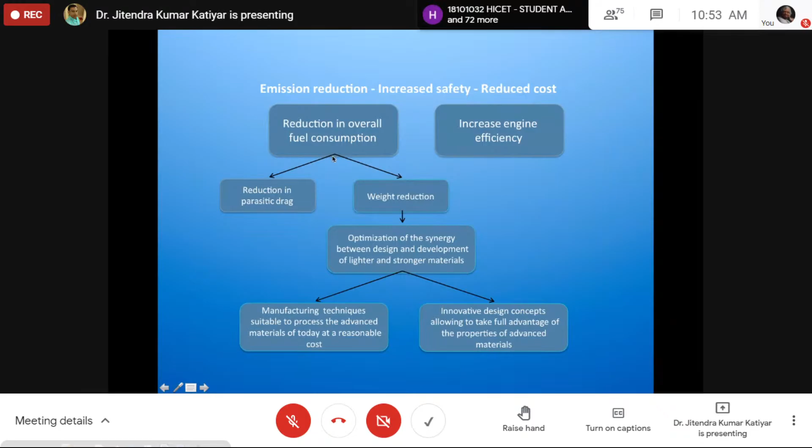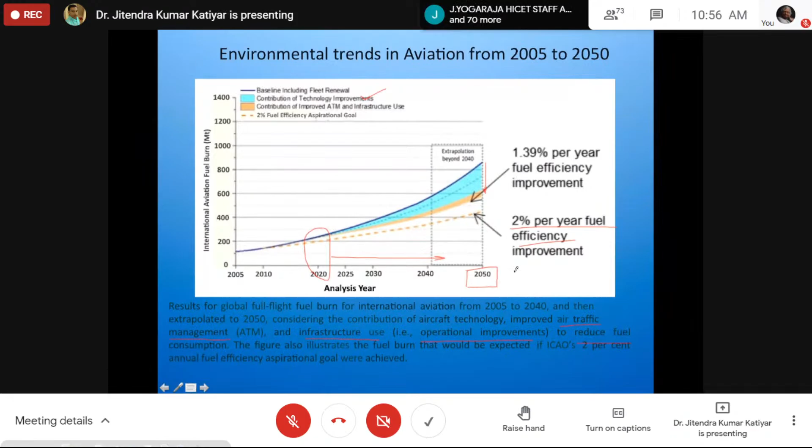So if you can improve operations through proper management of air traffic control, we can reduce the fuel consumption. If you can properly control the air traffic management, then you can improve fuel efficiency by 1.39% per year. These are the few figures predicted for international aviation fuel burn.

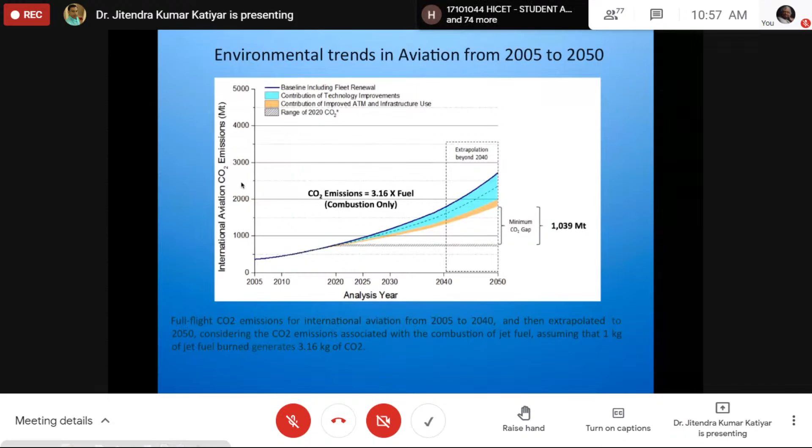Nowadays it is assumed that 1 kg of jet fuel burned generates 3.16 kg of CO2 by weight. That's why it is written here that CO2 emission equals 3.16 times the fuel. So if 1 kg of fuel is burned, you will get 3.16 kg of CO2 in the environment. So it is very important to control CO2 emission and keep the environment safe. We design the material, or we reduce the weight of the aircraft. These are the methods I already showed you through which you can reduce CO2 and NOx emissions.

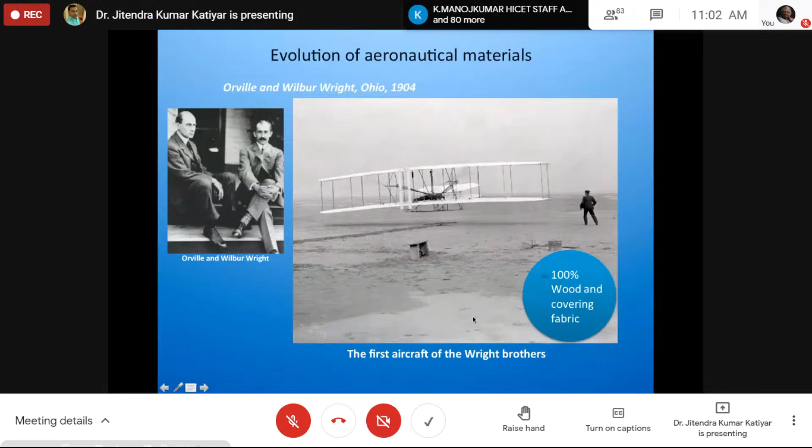We will show them one by one, starting when the Wright brothers developed their aircraft. The first aircraft developed by the Wright brothers, everybody knows it. They used 100% wood covered only with fabric. So this is the first aeronautical material, used by the Wright brothers: 100% wood covered by fabric.

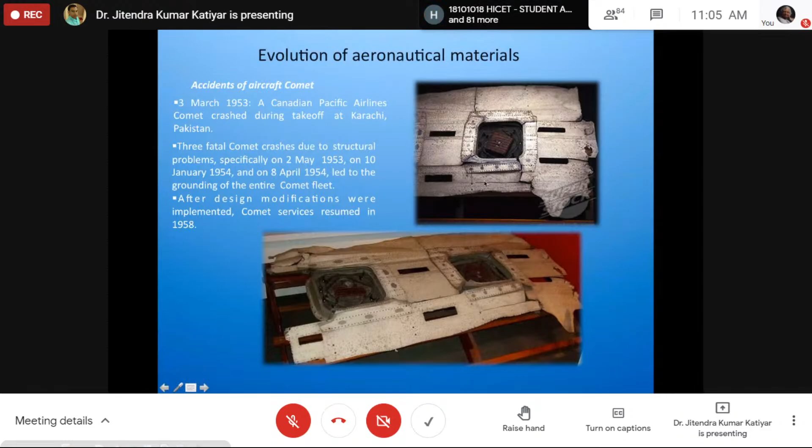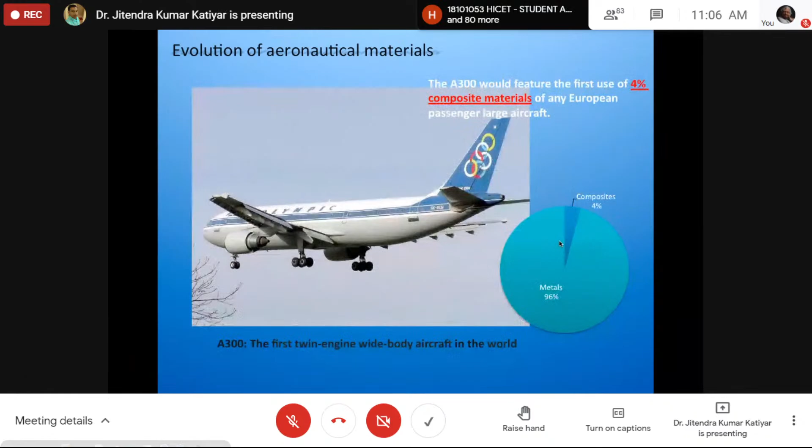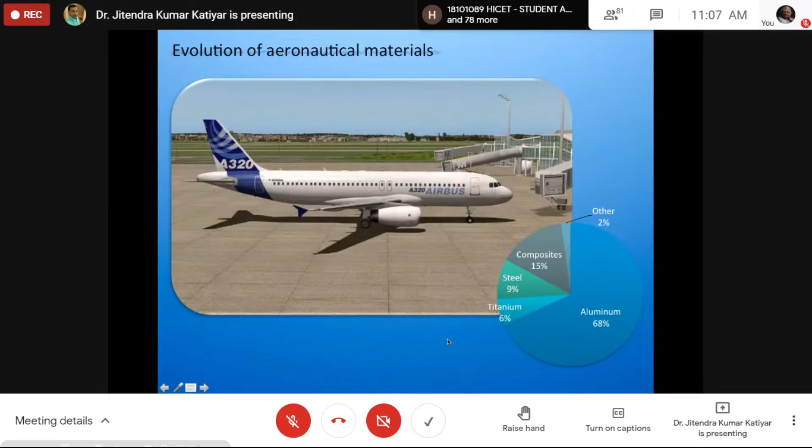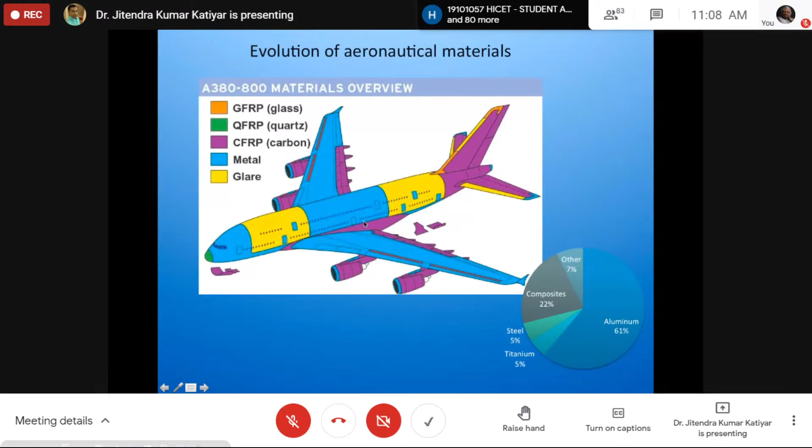So mostly for panels in this aircraft we use glass fiber reinforced polymer. This color you have seen in the tail, we use glass fiber and quartz fiber reinforced composite. These green ones we use in the tail. Carbon fiber reinforced composite is mostly used, maybe 30 to 40%. Then metal is reduced in some of the body; wings are made of aluminum metal and other things, and GLARE is also used for decoration-type purposes. So these are the new materials introduced recently.

So in aeronautical material, there are several parts: the nose and main landing gear, pylon and nacelle cowling, wing surface, fuselage skin, door, horizontal stabilizer, vertical stabilizer, steering, aileron, spoilers, flaps, and leading edge, or it is called a J-nose. So these are the materials you can see here. Mostly aluminum alloy was initially used, and these are now made of composite: carbon fiber reinforced, glass fiber reinforced, aramid fiber reinforced, and also we can reinforce titanium and steel to improve the toughness and strength of these jet engines.

For the landing gear, we need more strength because the whole weight comes over the landing gear. So for non-movable parts, we go for metallic ones. For movable parts, we go for composite ones. For engine and pylons, we go for steel and titanium. For landing gears, we choose steel because of its high strength, and it can also absorb shock. So these are the materials used in the aeronautical industry.

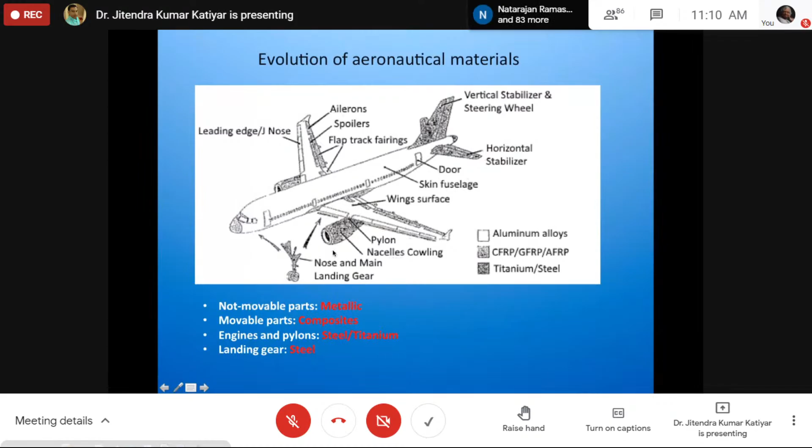If you want to operate your knee or hip joint, then we go for titanium material for knee implants. So orthopedic implants are made up of titanium, and nowadays we also use biocompatible polymer coating in orthopedics. So slowly we are moving to environment-friendly, biodegradable material that you can easily recycle.

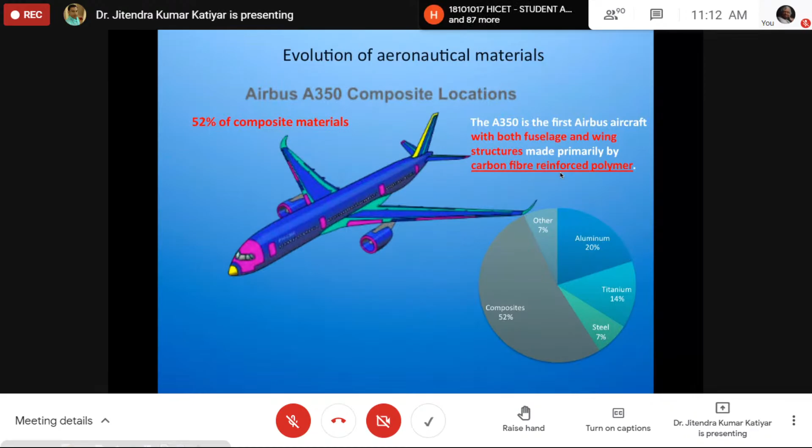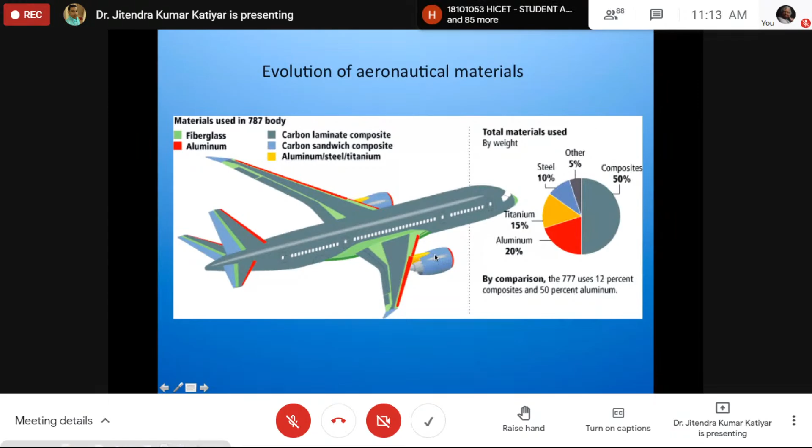So we are mostly reducing the aluminum, and all parts of this Airbus are made up of carbon laminate composite or carbon sandwich composite, with a very small amount of aluminum, steel, and titanium material where we need high strength, because the jet engine is held by the wing and flap. So for holding purpose it needs strength. That's why we use metal, aluminum, steel, and titanium, which provide more strength and can properly hold the jet engines.

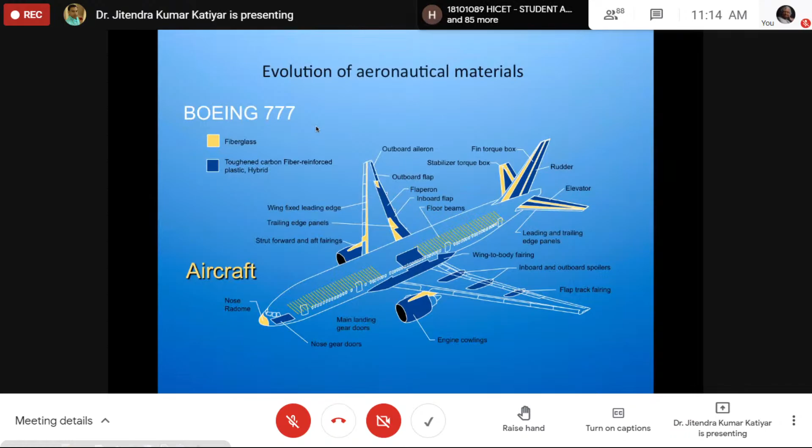So this also we are using here nowadays. Boeing 777 aircraft, we use fiberglass, mostly toughened glass, and a hybrid one also we mix with composite and metals. So that is the hybrid one. We use additives to improve the strength of each and every material of the aircraft.

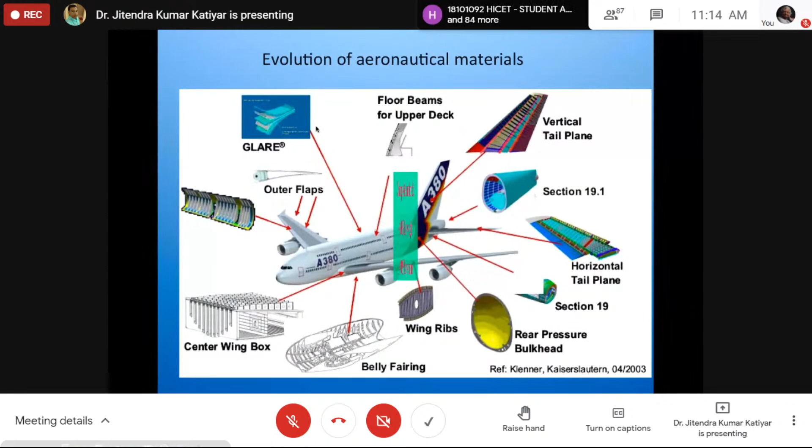So this Airbus 380, you can see the different cross sections, and in this particular Airbus, we use composite material 60% by weight and 80% by volume.

So mostly we are moving into lighter weight. When you reduce the weight of the Airbus, then you can improve fuel consumption, and it will not consume more fuel because of the light weight. So that's why if you want higher mileage on your bike or automobile four-wheeler, then you can reduce the weight, and you will get higher efficiency of your engine.

Like Splendor or Bajaj Platina, why do those bikes give more mileage? Because they are lighter in weight. But Bullet does not give that particular mileage, it gives only 20 or 30 or 25 because of the more weight. So if you can reduce the weight, then you can increase the efficiency of the engine.

So that is our aim also. Nowadays in automobiles also we are using composite material to improve strength as well as reduce the weight of the vehicle, so that you get more mileage from that particular vehicle. So these are the various evolutions of aeronautical material starting from 1904 till now, and now we'll move to the future.

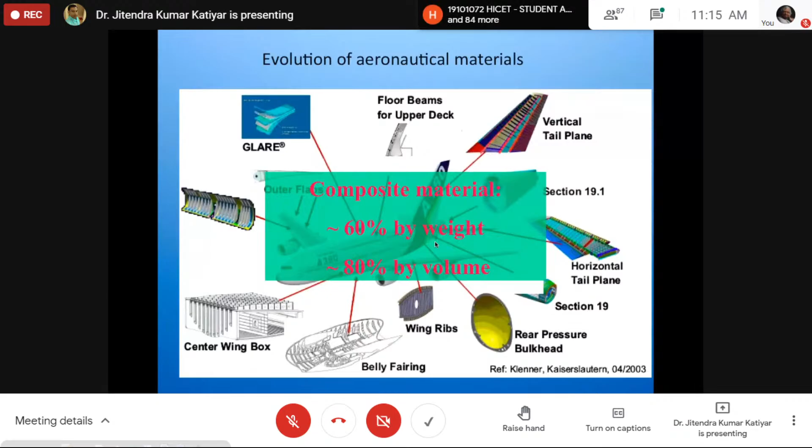So in this weight reduction, what we have seen is that the Airbus 380, which is 60%, has the lowest percentage of aluminum by weight of all flying Airbus models, with 20 different alloys and tempers compared to 6 utilized in Airbus 320 or 330 aircraft. So it is a very advanced aircraft, Airbus 380. It features application of new material, glare, in fuselage skins, giving improved fatigue and impact properties at lower density than existing materials.

That is why in Airbus we are mostly using composite material, hybrid composite material, to improve fatigue and impact properties. These are a few mechanical properties which are very important for your aircraft. So carbon fiber reinforced material and glare in Airbus let the weight reduction be 15 tons compared to what it would be if metallic material was used. So in this aircraft we reduce the weight by 15 tons in comparison to the metallic material used in other Airbuses.

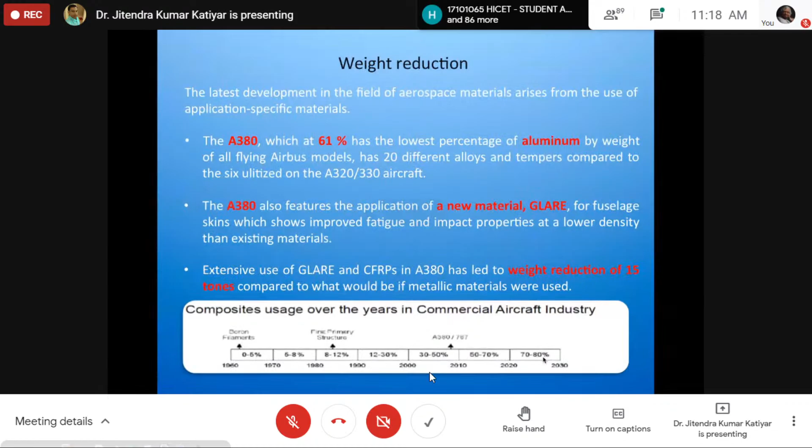So that metal we will use in the landing gears and a few flaps, that's it. Because landing gears can't be made from composite, since composite cannot absorb shocks and other things, so metal is good for that particular application.

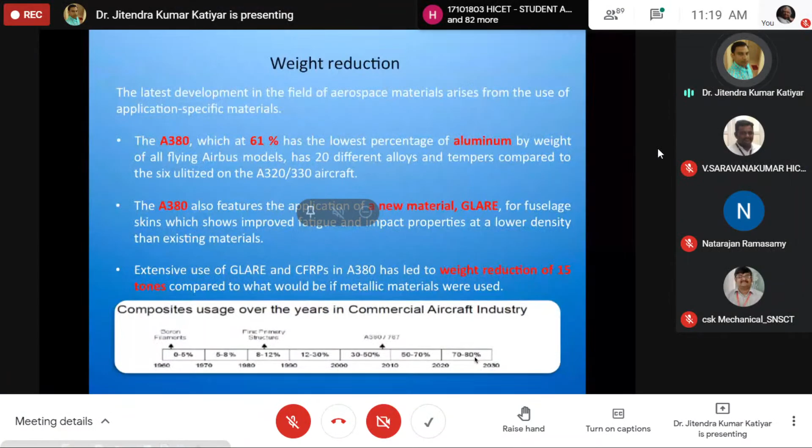So here, we just add the polymer, and we add some fillers. So we make the reinforcement and matrix, and we make the composite. This composite, like glass fiber composite, also needs to be made into a biodegradable biocomposite.

These are the biocomposites. So we are also targeting biodegradable composites for use in aircraft to reduce weight, so that we can improve fuel consumption efficiency. Biodegradable composite can be degraded easily in the environment without harming it.

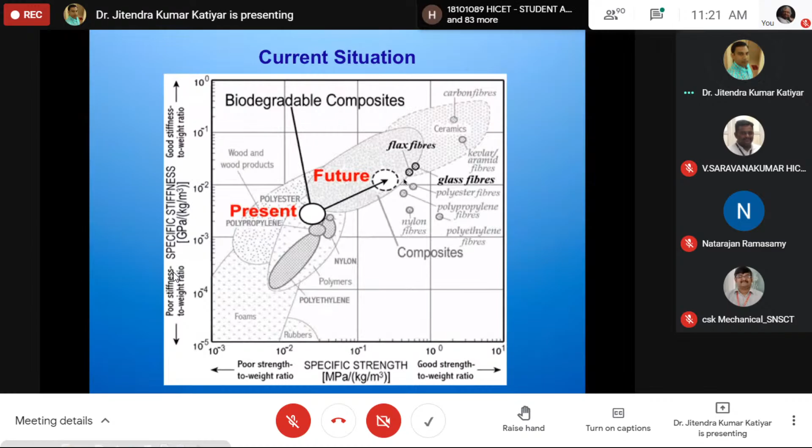So what is composite material? Because that is very important in fabrication. Composite is nothing but a mixture of two or more distinct materials to improve the property.

Each material has its own property. If you add just a single material, that will not serve the purpose. So what you will do is add 2 or 3 elements, and because each element has its own property, we can improve the complete property of the composite.

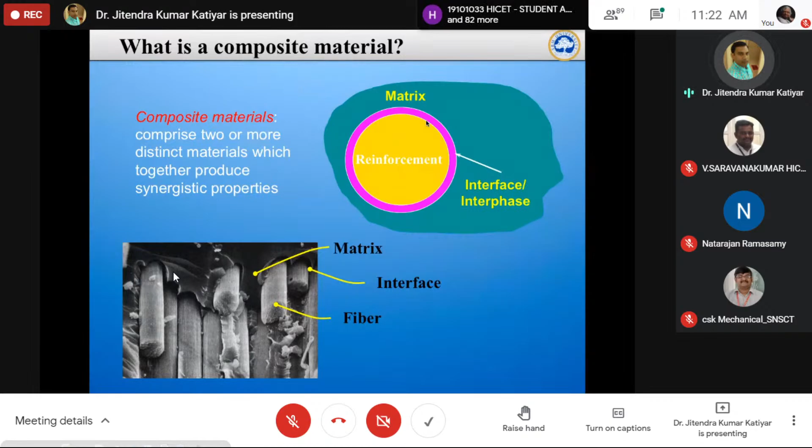It's like in a project group, in a final year project. Why do we select a group? Because each student has their own capability. Some students are good in entertainment, some in software, some in English writing, some in thinking, some in experiments. So we select the group, and one leader is required who can handle the group, who can club that particular group together. In that way, you utilize each student's property, and finally you get a very good product. That's also how we use it in materials.

So we add whatever our requirement is. According to requirement, we add that material, and the material properties mix together to give better properties than the parent material properties. That is called a composite.

So composite is nothing but the mixing of two or more distinct materials which together produce a synergistic property. That is called a composite.

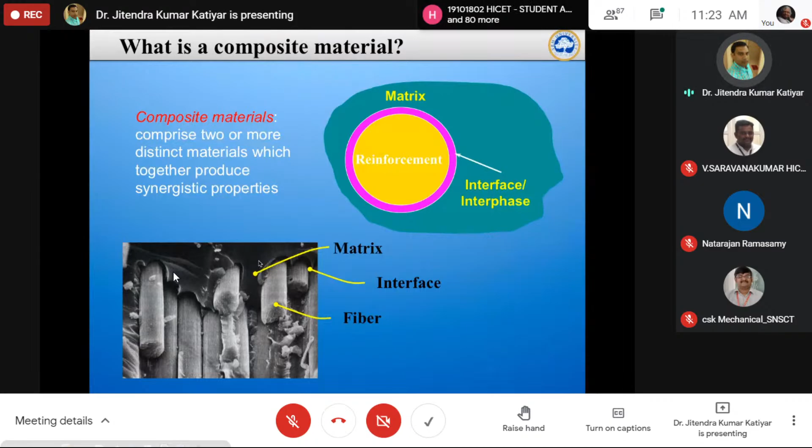The advantage of composite is high strength to weight ratio, and high stiffness to weight ratio that we need. If we can achieve this, we can save weight. If we can save weight, we can reduce fuel consumption. If we can reduce fuel consumption, we can reduce emissions of CO2 and NOx. Also, if weight is less, then noise can also be less.

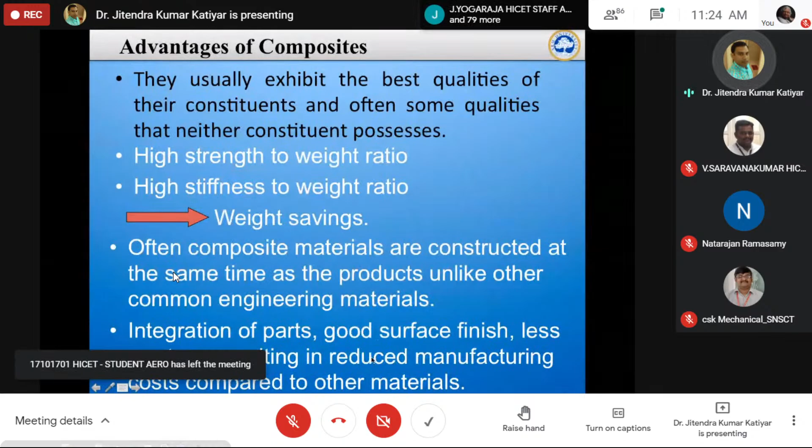Composite material can be constructed at the same time, unlike other common engineering materials, and it gives good surface finish, less wastage, and reduced manufacturing cost compared to other materials. Composite can have good fatigue property, good thermal property, and good thermal and acoustic insulation benefits.

According to the fiber and resin proportion we add, we can create the material property according to our need. So the main thing is how much quantity of matrix we need, how much quantity of reinforcement we need. If we can select properly, add it, and fabricate the composite, then you will achieve the desired property, whatever the requirement.

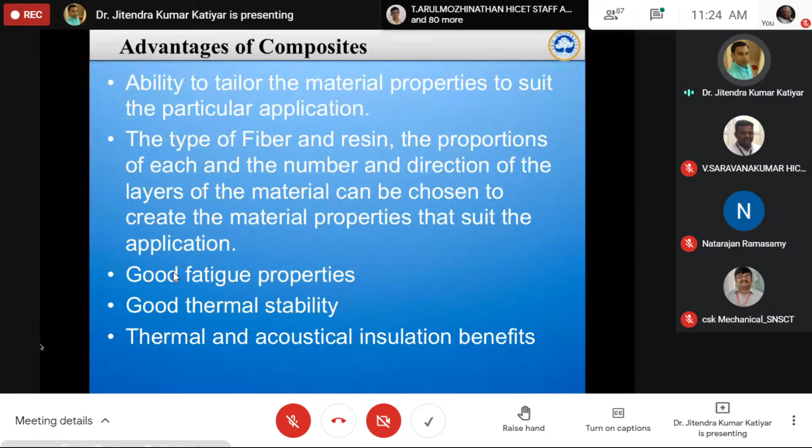Disadvantages of composite are that its initial cost is very high, it can behave in an anisotropic nature, and it has sensitivity to humidity. So we can also work on these aspects, on how we can reduce this sensitivity towards humidity.

Test methods also need to be developed so that we can test each and every aspect of the composite material, meaning tensile strength, fatigue strength, creep strength, and other properties. Test methods need to be developed because slowly we are moving to use more composite material in aircraft. In aircraft, several things happen, several loads occur, so we will see in further slides how the loads occur in the aircraft.

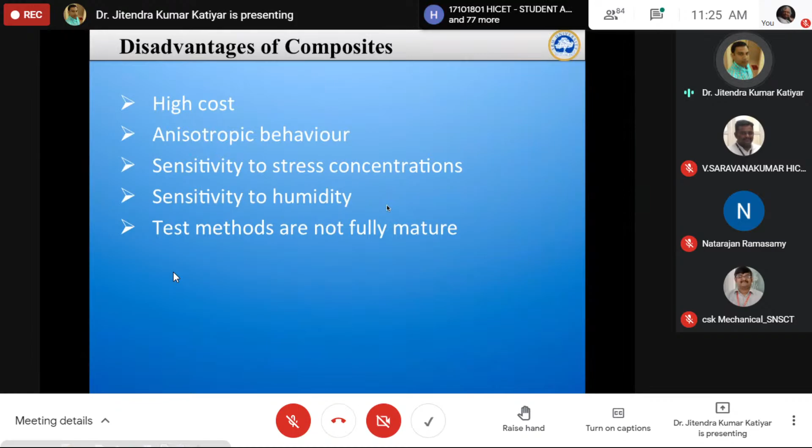So these are the classifications. We can go for either matrix type or reinforcement type. Three types of matrix are most widely used: polymer matrix, metal matrix, and ceramic matrix. Nowadays, polymer matrix is used in self-healing composites. Reinforcement comes in different kinds: whisker, particle, fiber, structural, and these are the further subcategories of reinforcement. So these are the basic classifications.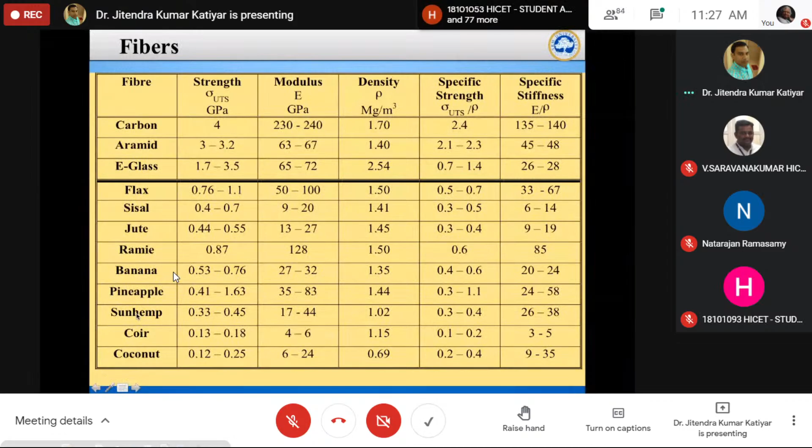This hemp fiber, you can see, has approximately E-glass fiber stiffness. According to that, we select hemp, which is widely used. Flax is also used because flax has more stiffness, close to aramid and other things. So flax and hemp are the fibers used as reinforcement.

Matrix is nothing but we can use epoxy, polyester - these are thermosetting - or metal one, or ceramic one. Nowadays we select epoxy because it is very good. PEEK and other things, we can't use those.

According to mechanical property, if we use metal, the mechanical property is good. But if we use polymer, the mechanical property is poor. So our target is how we can improve the strength or mechanical property of the polymer - what composition we add in reinforcement, which type of reinforcement we add in the matrix, so that we get a property at least similar to that particular metal, if not greater.

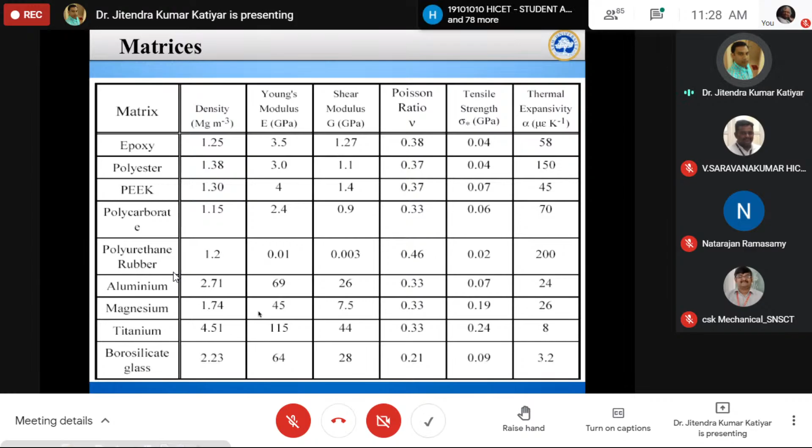In this way, research is still going on, and we are developing new materials by adding graphene, multi-wall carbon nanotube, or natural fiber, to improve strength and other properties. These are the various characteristics of the matrix required in terms of mechanical and thermal properties, processing characteristics, and chemical properties.

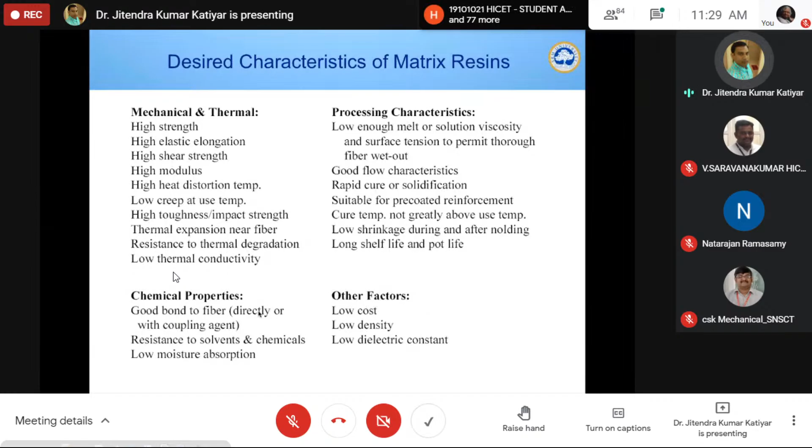So these are the various characteristics which are very important in selecting the proper matrix material. This evolution of the material I already explained earlier, but you can see here from 10,000 BC up till 2020 how the material is

developed as per our requirement. So initially we only have the stone, flint, pottery, glass. These are the ceramic materials. Wood, skin, fiber, straw, bricks. So these are the oldest materials. After that, according to our requirement in polymers, glue will come, then bakelite will come in 1900, nylon will come, then nowadays we are using high temperature polymers also, high modulus polymers.

These are the generations, and this is carbon reinforced fiber, aluminum, AFRP also, GFRP also. So these are the composites initially developed, and after development of these composites in this era, we increased the concentration of composites in the aircraft industry after evolution of these composites AFRP, CFRP, GFRP. And superalloys, zirconium alloys were also developed. Zirconium is widely used in nuclear power plants, and nuclear power is also booming nowadays. So this is how the material developed as per our requirement.

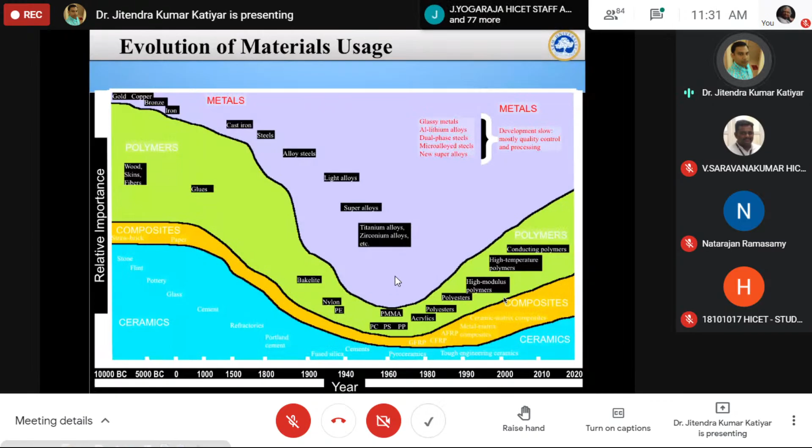So now we are further developing composite material which is biodegradable in nature, which does not affect the environment and also reduces the weight of the material. So back to the past again, you can see here Egypt. Egyptians and Mesopotamians used a mixture of mud and straw to create strong and durable buildings, and those buildings are still good if you maintain them properly.

So Egypt maintains that property, and it can increase tourism in that particular country. Mostly Egypt earns money from tourism only. But in our country, that is very poor. Nowadays, slowly we are increasing tourism. But previously, we were not able to sustain our old forts. If we can sustain them, then at least we can also improve tourism. That's why India is lacking in tourism. But slowly in the Modi government, we are targeting to increase tourism, and nowadays tourism has improved approximately 5 to 10% in India.

And this particular shield used in war, you can see two external laminates of hard bronze, two internal ones of tin, and a central laminate of pure and soft gold. So this type of shield was used in war in ancient Greek times, and this is the Egyptian times.

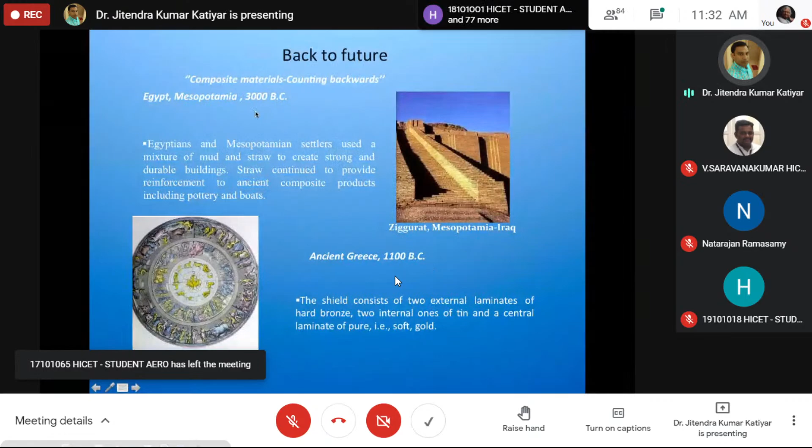So if sometimes fire happens in that particular aircraft and the temperature increases, it will not affect the material of the body structure. So that type of structure we need, and more adhesive in nature so that it will not be destroyed. So light structure design philosophy, we go into nowadays. Light structure is a matter of design, not a matter of weight. So how you can design properly is very, very important, not weight. Material selection is one major driver in light structure design philosophy.

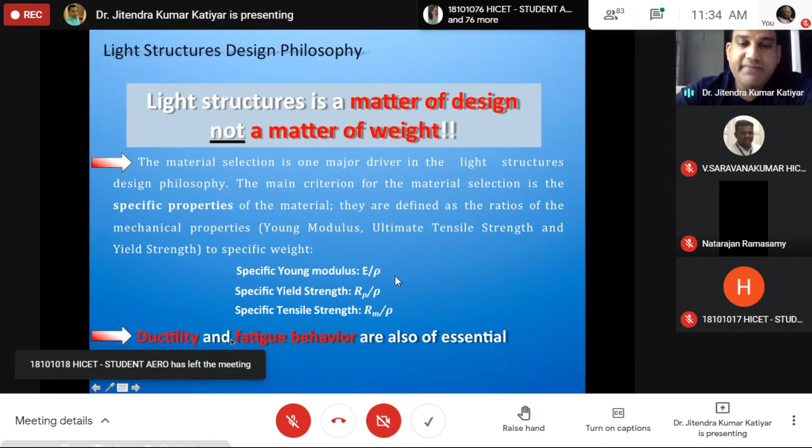First, we select the material. Nowadays we are targeting magnesium also, because it is a very light material. The main criterion of material selection is the specific property of the material, like Young's modulus, ultimate tensile strength, yield strength, per density. So specific Young's modulus is nothing but Young's modulus divided by the density of the material. That is called a specific property. Ductility and fatigue behavior are also essential concerns in the selection of the material.

Because you can see here the forces on the airplane, the 4 forces on the airplane, are very important. It is moving forward, so thrust force and drag force, then weight from the center of gravity, and the lift. These forces, thrust, lift and drag, act on the aircraft, and by controlling these forces we can fly, take off, and land that particular aircraft.

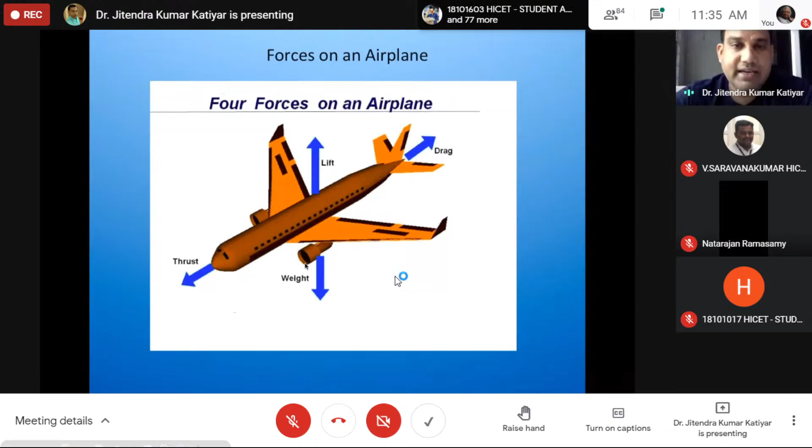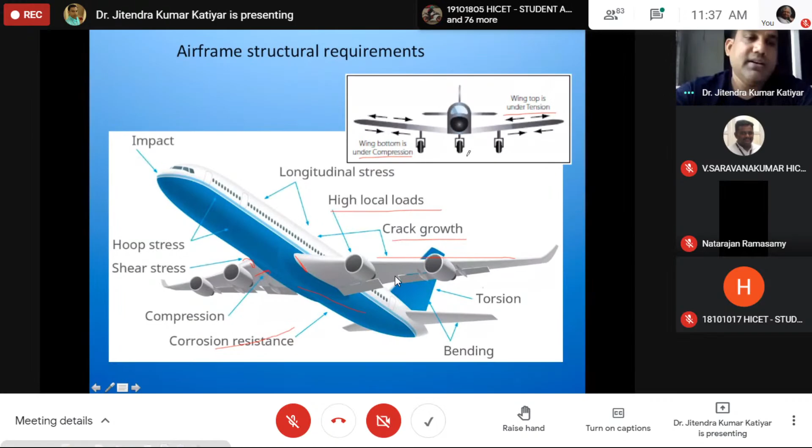So we can control the material, and we can control these loads. These are the very important mechanical properties required, and these are the design parameters. First, you select the material. According to the selection of the material, we perform the simulation taking into account these mechanical properties.

So aircraft structure material: we can go for 2024 T3, that type. Aluminum is the main base element, and other elements are added to improve the structural strength. You can see the ultimate tensile strength, Young's modulus, density, elongation at fracture. It can be improved, like aluminum 7075. That is widely used, with these other alloying elements, and it possesses more strength.

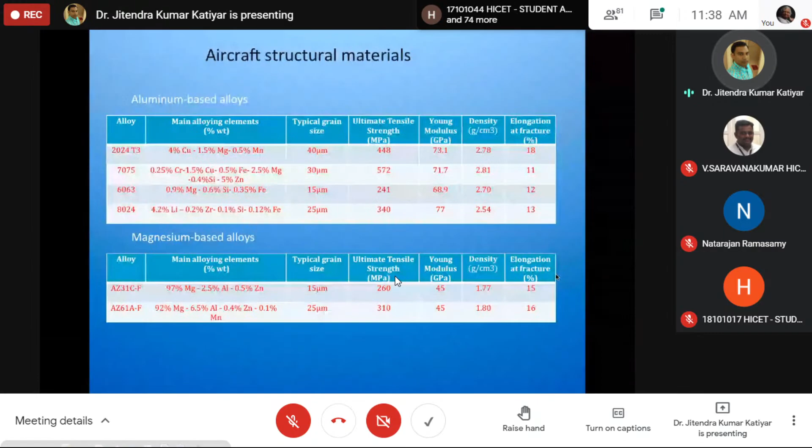Magnesium based alloys have more than 97% magnesium, with other elements aluminum and zinc. These kinds of alloys are called AZ31 or AZ61. In that one, we add 6.5% aluminum and 0.4% zinc. You can see the ultimate tensile strength is also improved in AZ61AF. So according to the alloy, we add the element and test the material's ultimate mechanical properties. That is very important for structural applications.

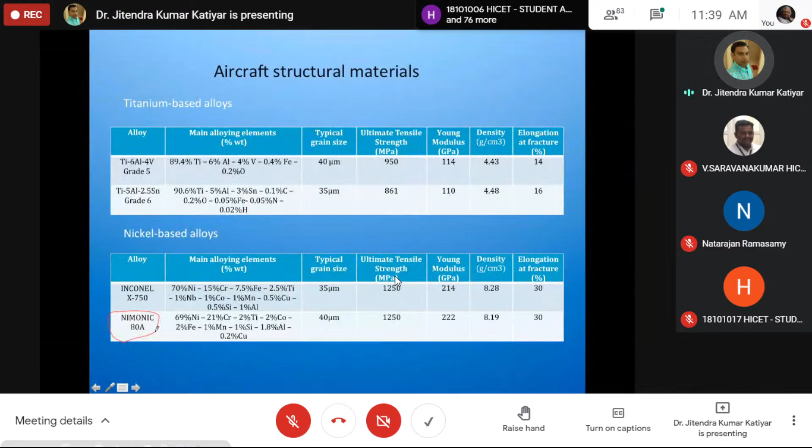Similarly, with titanium based alloys we get better ultimate tensile strength, better Young's modulus, and other properties too. Nickel based alloys go further than titanium. Inconel or Nimonic 80A gives you more tensile strength, more Young's modulus. These are the newest materials; after composites, we use these types of material in fabricating the aircraft structure wherever metal is required.

So according to our need and application, whether cargo based, passenger based aircraft, space aircraft, or fighter aircraft, whatever type of aircraft you want to develop, we select the proper material. After selecting the proper material, we do the testing. That is very important. So these are the differences between metal and composite materials.

We compare them here in terms of density, specific modulus, and specific strength. You can see with composites nowadays, we achieve a higher specific Young's modulus than metal, and also a higher specific strength than metal. So Kevlar fiber or carbon fiber reinforcement; that's why carbon fiber reinforcement makes up approximately 60% of the aircraft, and Kevlar fiber reinforcement is also used because of the high strength and high Young's modulus.

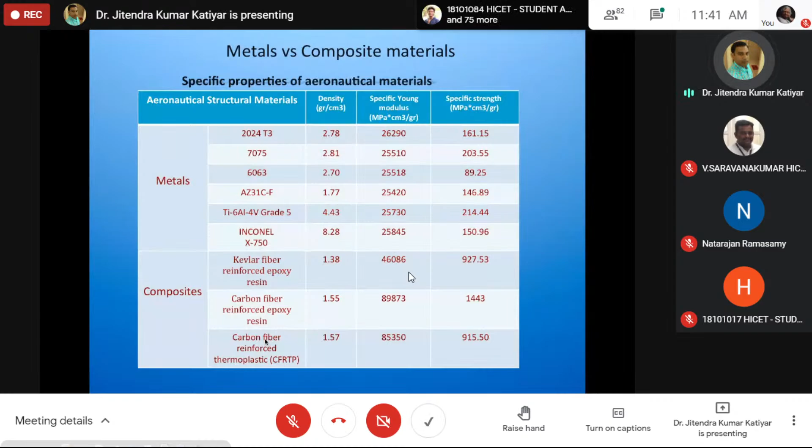So composite materials have the advantages: high strength to weight ratio, you can tailor-make the mechanical properties in various directions, corrosion resistance, impact resistance, design flexibility, and also fatigue resistance. But in the case of metal, it is safe, with high ductility, damage resistance, conductivity, because chances of crack propagation are also more in metal, and it is cost effective.

Joinable by various methods. So these are the metals, but in composites we can't join various materials. And drawbacks in composite material: reduced electrical conductivity, brittleness, inferior fire resistance, unpredictability, lack of recyclability, like in thermosetting if we are using it.

Heavy structure, prone to corrosion damage, inferior creep resistance. So in composite material, we need to improve the creep property also, apart from the fatigue property. And also we can look into the recyclability of the material, because metal you can recycle, but composite, if you are using thermosetting, can't be recycled. That you have to take care of.

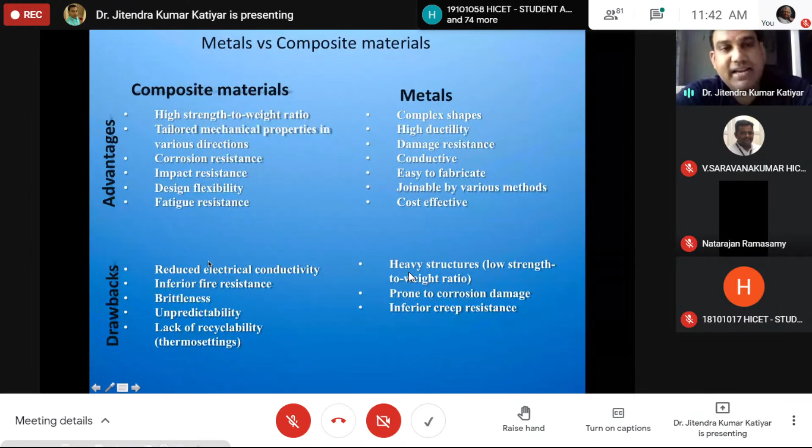And also composite material is brittle in nature. So how you can improve the toughness and other properties, and a little bit of softness we can incorporate by adding some material. Research is still going on. So this is the basic difference between metal and composite material.

It is cheaper than thermoplastics. It is chemically resistant, but thermoplastic is not chemically resistant. More difficult to surface finish. It can achieve a good surface finish. So these are the basic polymers which are used in the fabrication of composite structures.

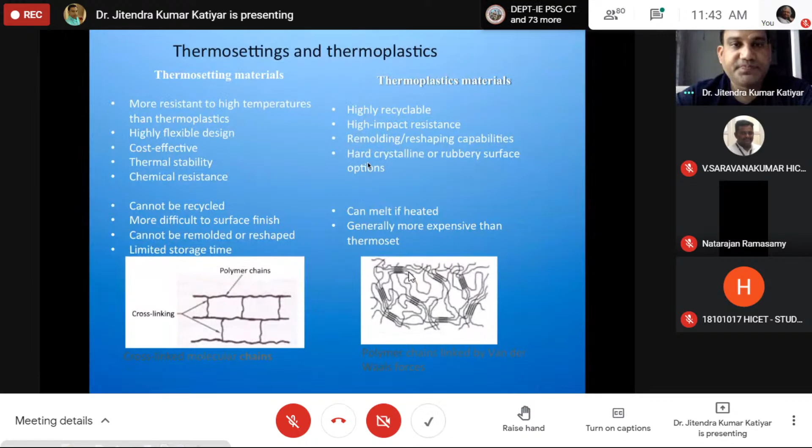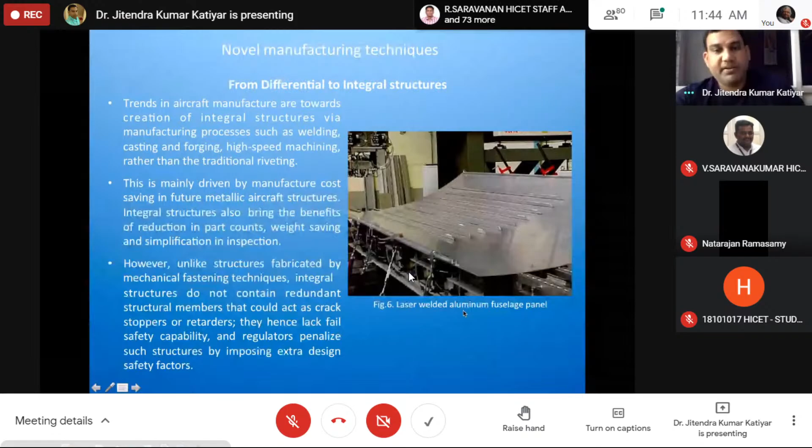Novel manufacturing techniques are also very important, how you can manufacture things. So laser welded aluminum fuselage panel. If you fuse panels, we use this type of heat affected zone. That is in manufacturing techniques. Sometimes we use thermoplastic components like this, and a metallic integral structure based on specific manufacturing such as welding, casting, forging, large scale extrusion, and high speed machining. This permits the modular prefabrication of large sections of aircraft before final assembly.

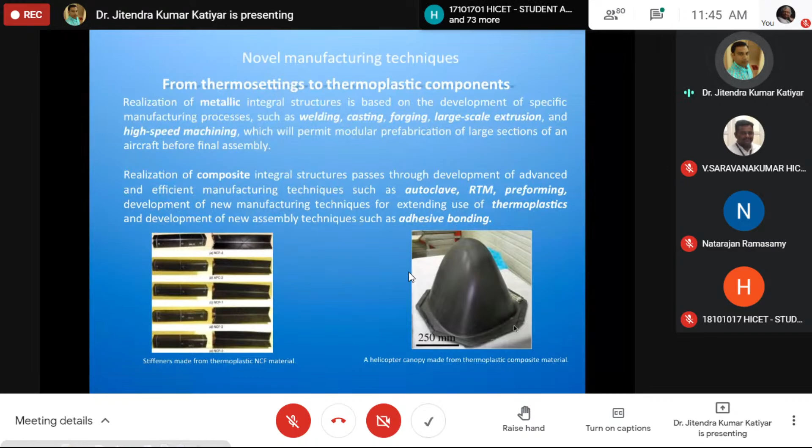So this is the nose aircraft canopy. A helicopter canopy we can make from thermoplastic composite material. So we can use different kinds of material; we select different materials and different processes. And the future aeronautical material is called a multifunctional material.

So we have polymers in it, so it can polymerize, and it can also have a healing agent. So if this is the composite material, you can insert some healing agent like this. These healing agents act as packets. So when cracks develop here, the healing agent packet can burst, and the healing agent in the packet comes out and fills that body. So the self-healing property can be improved.

Like in Hollywood movies, you have seen the Wolverine series. Wolverine has a self-healing property. If something strikes his body, it can heal again and close that impact. Self-healing properties are also available in animals. So taking inspiration from nature, we also produce self-healing materials.

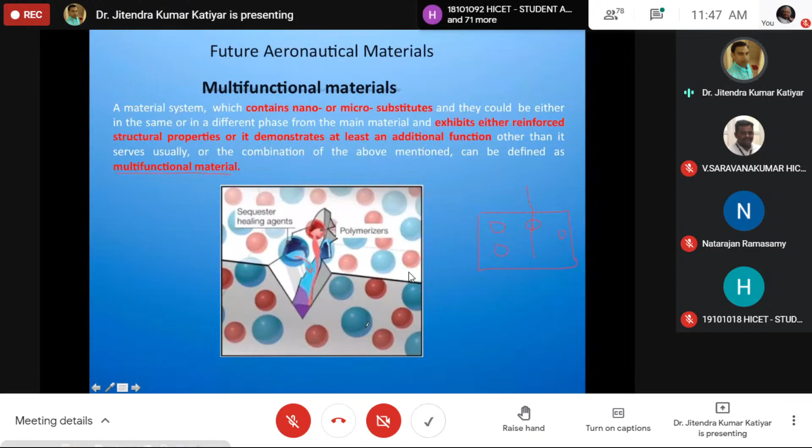So that's why, due to the higher friction, sometimes cracks develop, and those cracks can immediately be filled automatically. So that is called a multifunctional material.

Then another material which is very strong, that is graphene. It is a new development of the 21st century, and that material is very strong. It can even hold an elephant, that much strong. Its Young's modulus is 1 terapascal, and tensile strength is 1100 gigapascal. So graphene is the strongest material developed in the 21st century.

And if we add this nano graphene inside the matrix, then we can improve the strength. And that type of reinforcement is called carbon fiber reinforcement. This graphene is nothing but an allotrope of carbon. So this is carbon fiber reinforced composite.

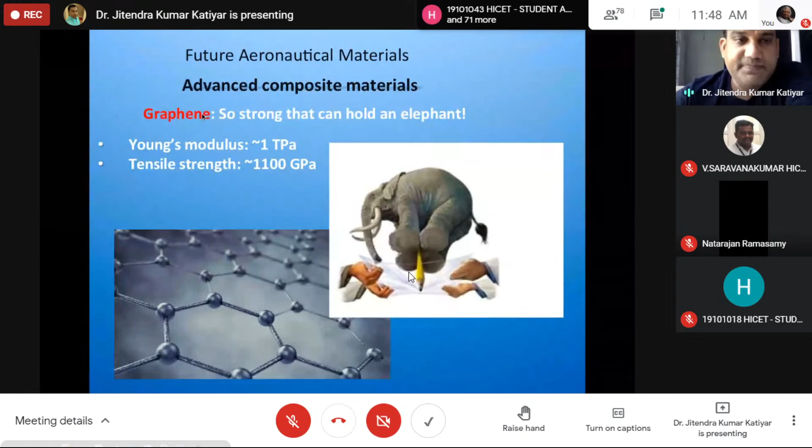Another is the multi-wall carbon nanotube, and these are also used in advanced composite materials. Young's modulus is 1 terapascal and tensile strength is 60 gigapascal. Electrical conductivity: wherever we need electrically conductive composite material, we use the carbon nanotube. So this is widely used in the electrical industry; the composite material which contains carbon nanotubes has better electrical conductivity. These are the structures of the carbon nanotube. So this is also a future aeronautical material.

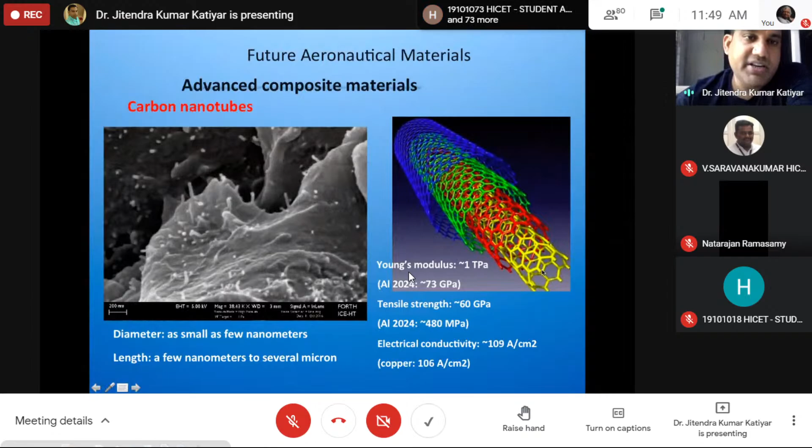Self-healing material, as I already told you, is also a multifunctional material. Polymer structures are susceptible to crack damage. So this is the polymer material where you have inserted some catalyst or microcapsules. When cracks propagate, they can burst this healing agent. The healing agent comes out, polymerizes, and fills the gap.

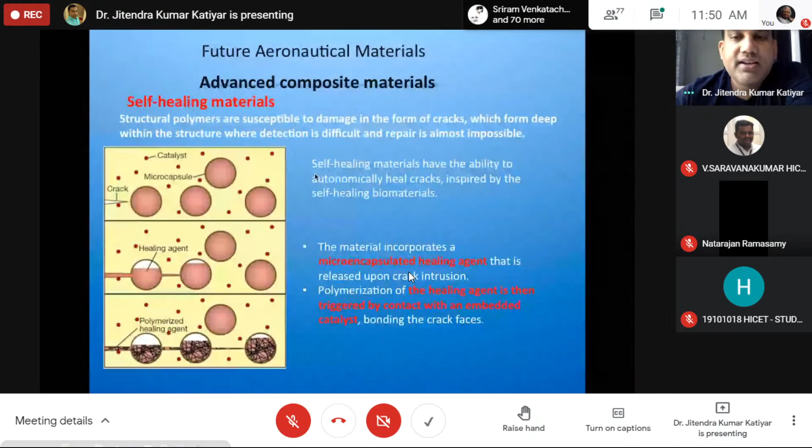So self-healing materials have the ability to autonomically heal cracks, inspired by self-healing biomaterials. The material incorporates a micro-encapsulated healing agent that is released upon crack intrusion. After crack intrusion, the healing agent comes and the polymerization reaction happens, triggered by contact with the embedded catalyst, bonding the crack faces. So these are also future materials, and nowadays in spacecraft we are using self-healing material, which can automatically repair itself if cracks develop.

So the problem to be solved: to take advantage of the improved properties of multifunctional materials, there is a need to assess the effect of additives on the mechanical behavior and possible degradation of the mechanical behavior of the material. We use new multifunctional materials which reveal the significance of material production quality on the entire multifunctional material concept, which directly affects the degree of internal defects. These techniques should be affordable and low cost, and can enhance the use of the promising characteristics of the material in aircraft structure applications, in the future and nowadays also.

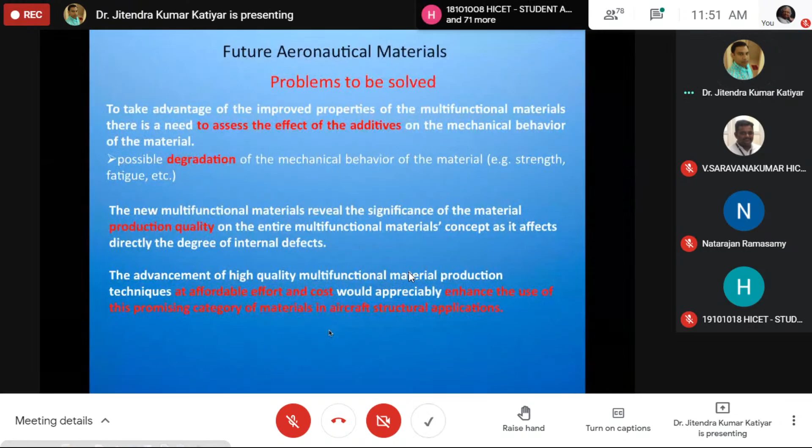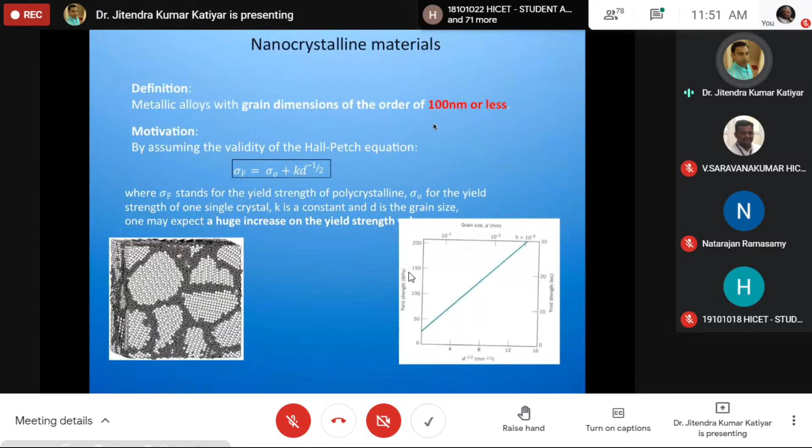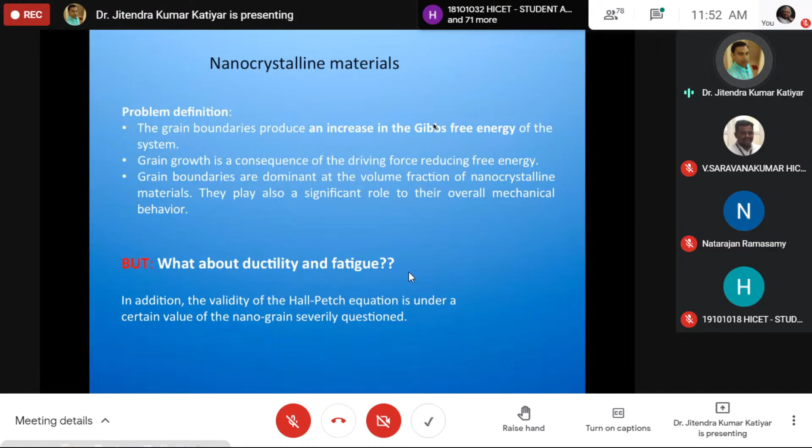So nanocrystalline material is also used. Metallic alloys with grain dimensions on the order of 100 nanometers or less are called nanocrystalline materials, and in the future we can also use them, because of the huge increase in yield strength after adding nanocrystalline material inside the matrix. What about the ductility and fatigue strength after adding it? Research is still going on. So you can also take some nanocrystalline material, add it in the matrix, and perform this test.

By adding this nanocrystalline material, it can significantly improve material properties at ambient temperature, and the objective is reducing the driving force by producing a metastable equilibrium state. The kinetic mechanism is reduced mobility; it does not eliminate the free energy driving force. The thermodynamic mechanism is creating a metastable equilibrium state, where the driving force is eliminated at the critical grain size. So that is a very stabilized material, nanocrystalline material, which is also a future material for aerospace applications.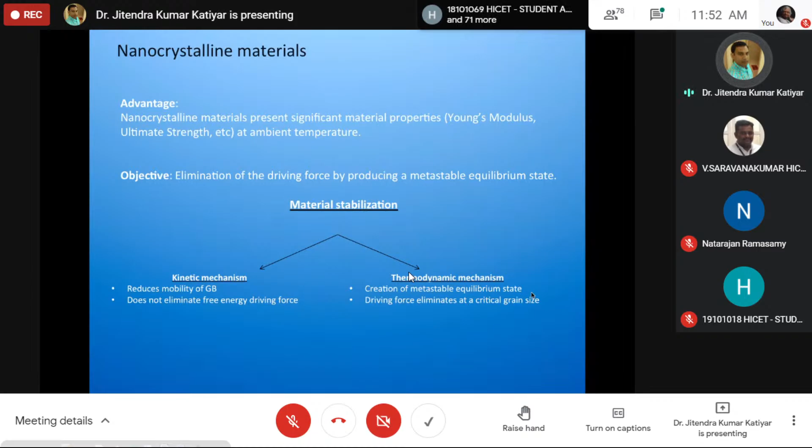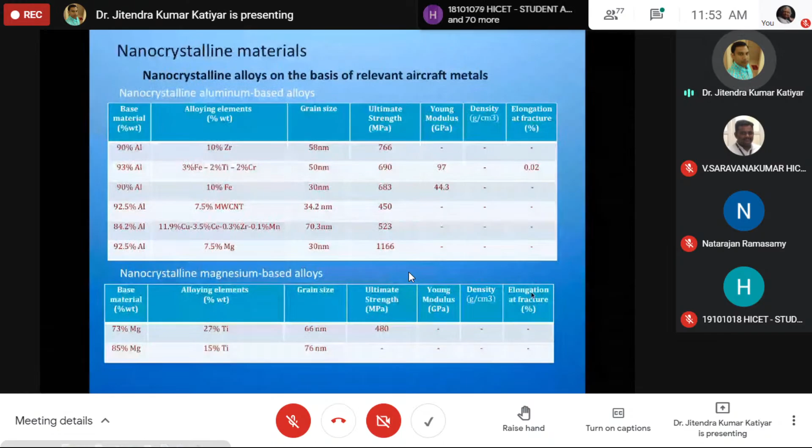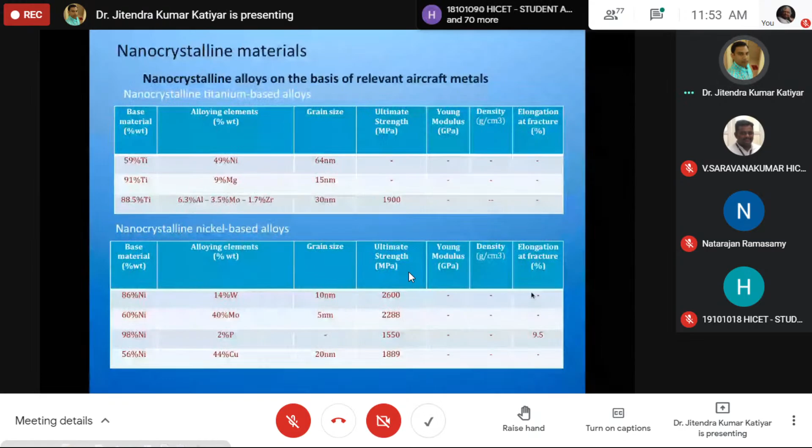So these are a few mechanical properties of nanocrystalline material added in different base alloys: aluminum, magnesium, titanium, and nickel. We can check the different mechanical properties according to our aircraft metal. So these are the future of aeronautics.

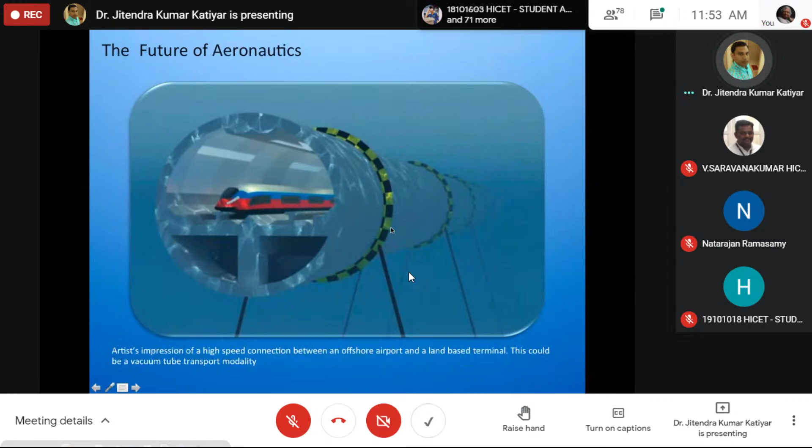These are different NASA images I have taken. So this is terminal-based offshore, meaning inside the sea we can go from one place to another. That is also there, and these are the future of airports. Such kinds of airports are also being developed.

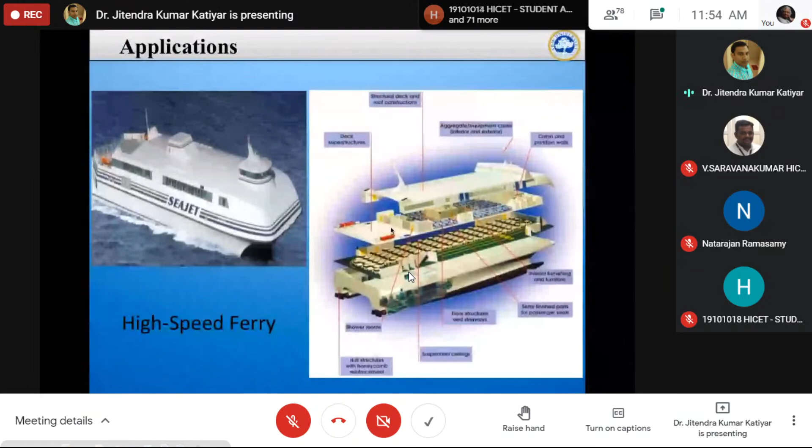Monorails are also used to transport from one place to another. So these are various applications of composite materials: boats, sports equipment, cars, power generation, and buildings, structures and bridges.